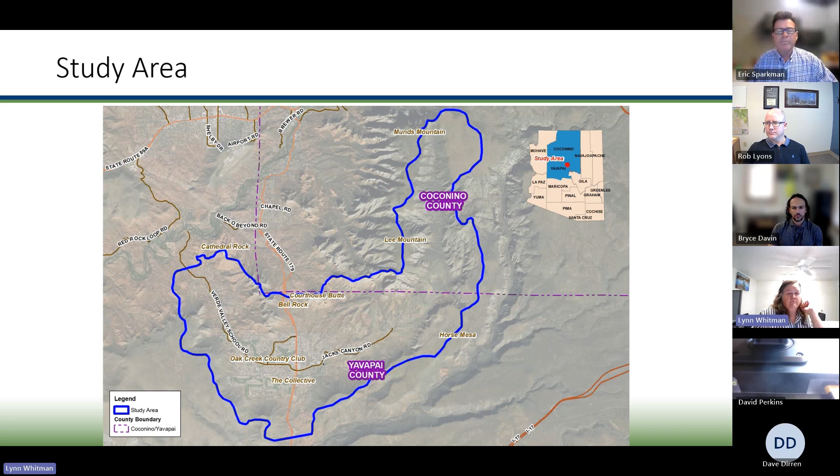Oh yeah, with that 2008 study, we identified 13 problems. We actually designed 6 projects and completed 3 of those. The other 3 projects, we had a hard time getting easements from people. I remember trying to get easements, and people either weren't interested, or a lot of it was people who didn't live in the area - they just weren't interested. So that one kind of died there.

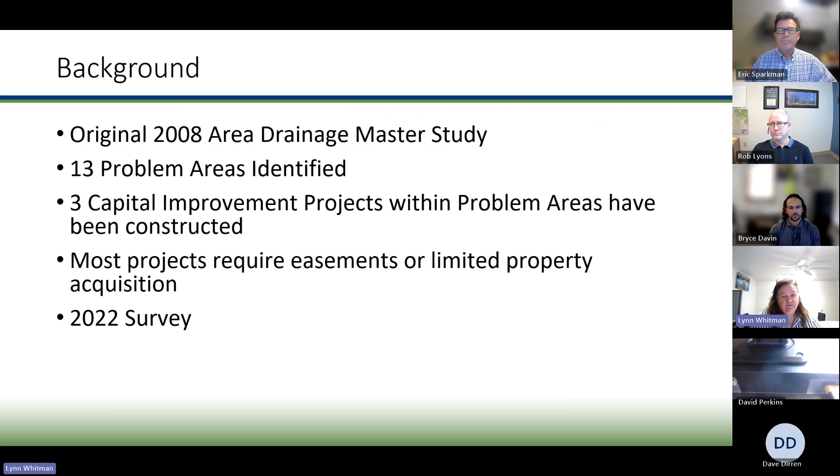So when we started this one, we wanted to make sure people knew: if a project comes through your area, are you going to be willing to provide us with easements? So in 2022, when we kicked this one off, we sent out a survey to everybody. The survey asked for information on drainage on your property, erosion on your property, anything in the area around you. We received 117 responses, which is really great turnout compared to some other projects we've done, and it gave us a lot of information and insight into where we should be looking and what kind of things we should be looking for.

So we wanted to develop a model that would simulate the existing drainage infrastructure. We wanted to be able to look and see where the problems were in the model as well. So we had information from residents on where they were seeing problems, but we also wanted to run a good rainstorm through a model of what's out there and see how much of it matches up, and if we can identify other areas that maybe people didn't talk about.

So we identified those regional problem areas. We talked about those at the last meeting and put those out for the public to review and let us know if they had any comments. Then we develop conceptual flood mitigation alternatives - we look at the problem areas, pick the ones that seem to be the biggest problems, and start talking about what we could do, what kind of projects we could put in to alleviate some of these issues.

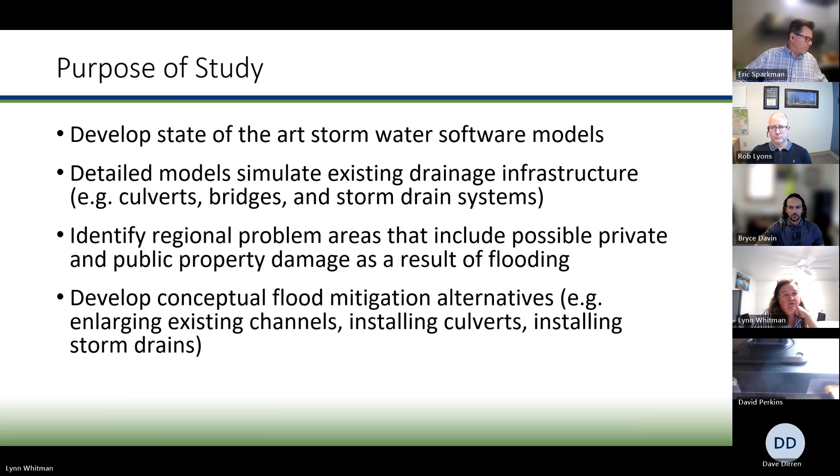And I believe this is where I pass it off to Rob so he can talk about the modeling.

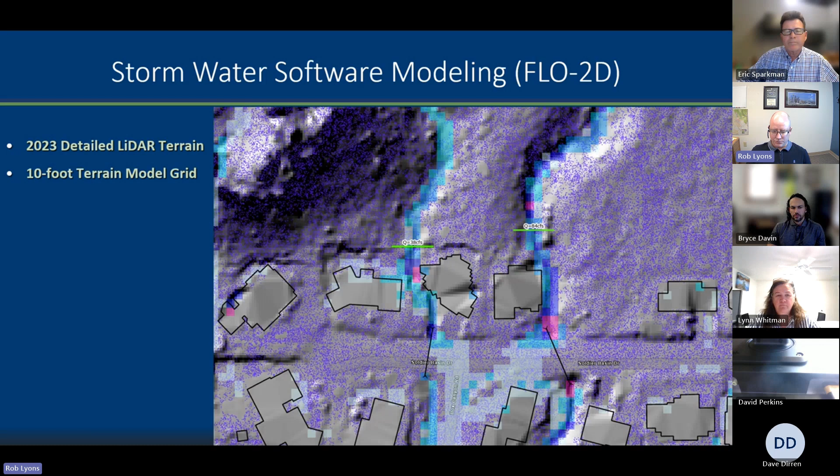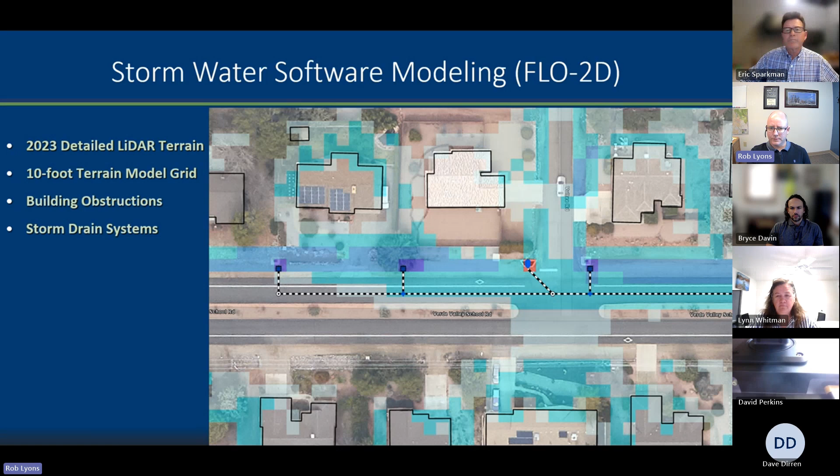And then we add building obstructions, storm drains. You can kind of see that in this aerial view here. This is on Verde Valley School Road. There's a pretty big storm drain in that road, if you're familiar with it. It's got catch basin inlets. Here's an example of one. This one's a little bit larger for even bigger flows.

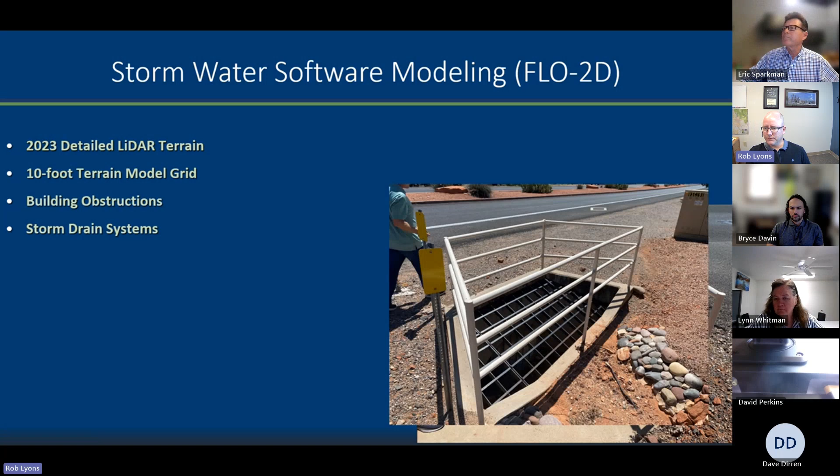You've probably seen lots of manholes, pipes, and then we also add in culverts and bridges. There's a number of those, particularly on Jack's Canyon Road.

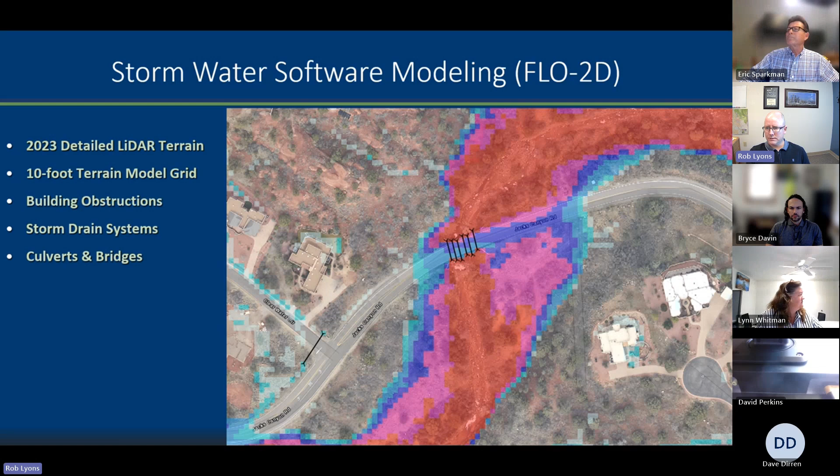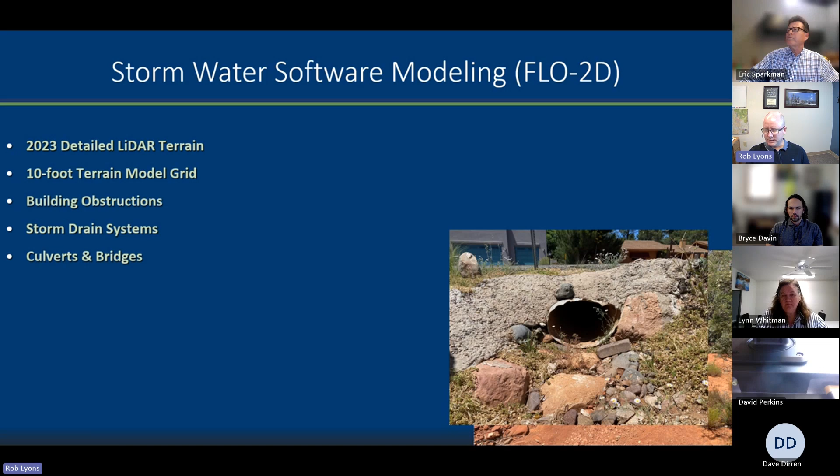There's some examples of some culverts or inlets. There's a driveway culvert, it looks like it's a little smashed. And another bridge.

And then with that, once you've got everything parameterized, you have a model that will give you results for any event you run. So you might have heard of the 100-year flood or a 10-year storm. We can run all those events, and that gives us design flow rates for if we decide we need to add a new culvert, or we want to add a storm drain or add a channel. Well, how big does it need to be?

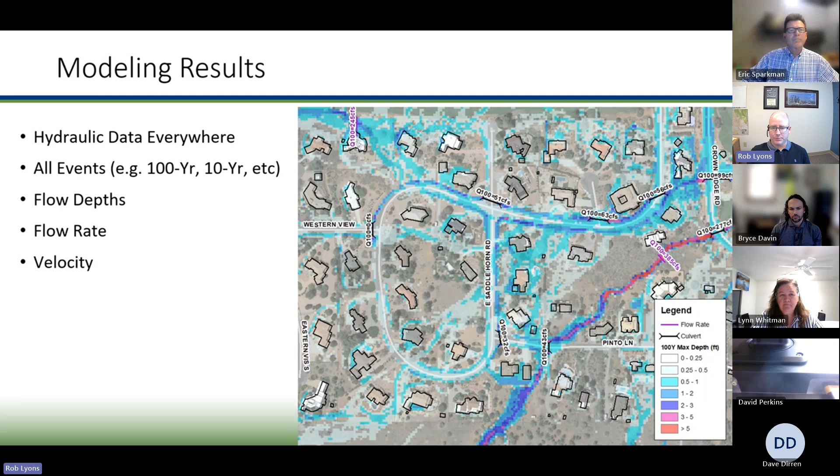So we need that information so that we can estimate how much flow is going to get to this proposed facility. And then it also shows us where the water's going, and is it intersecting with homes, for example, and it gives us flow depths, flow rates, and velocities. And velocities - the higher the velocity, the more erosive it is. So if you're building a channel, you might need to armor the channel so that it doesn't erode.

And then based on that data, we can combine it with additional ground truthing data that Lynn touched on, such as drainage complaints or just areas of known flood problems from the residents or from the county staff. We have the inundation analysis - that's where we basically take those flow depths and intersect them with building footprints, for example, from a product you get from the mapping company. And we can estimate, okay, it looks like some of these homes might get flooded in a 10-year flood or a 100-year flood. We don't know if it's true or not, because the data isn't that rich. It's close, but it's just another indicator that, like if you see a cluster of homes, for example, right here, there might be a problem there.

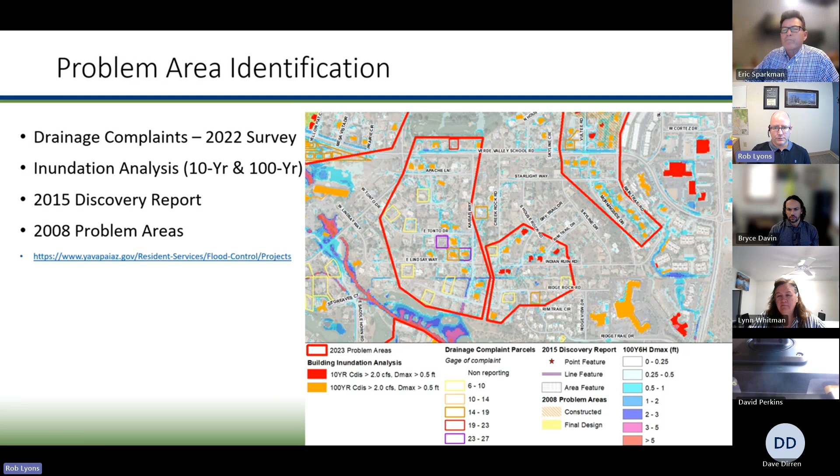There was another FEMA study that was done back in 2015, the Discovery Report. You can take some of those problem areas, and then, like Lynn mentioned, this original study was done in 2008, so we also looked at those problem areas. Then with that, we've identified clusters of areas that appear to have problems, and then basically call that a potential problem area, and then start looking at solutions.

So let's see, multiple ideas. We decided to just take the top 11 hazard areas. I think we had 17, but got to draw the line somewhere. And then we started to look at what are the things that might solve this problem. All ideas are on the table. And then once you have that list, then you can start going through and saying, this isn't going to work because we don't have the land, or it's going to be way too expensive and it won't pencil out.

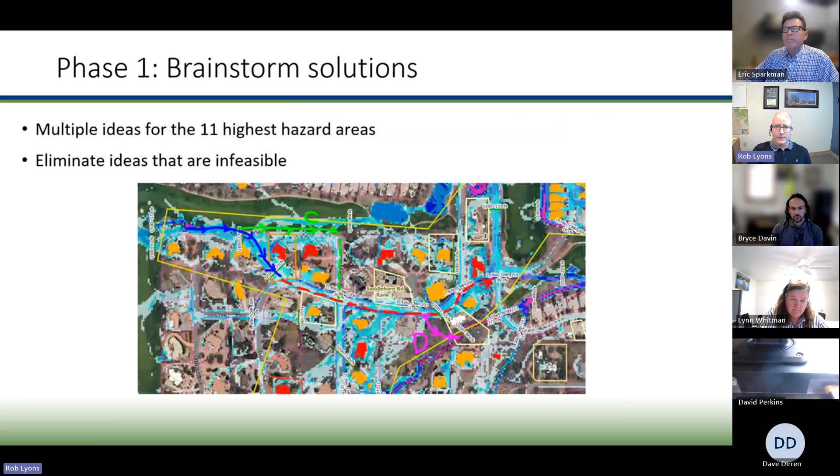So that's sort of phase one. And then we move into what we call phase two, which is, okay, now of the solution set that we think might have some legs, something that can actually work, you might be able to find some right of way, not super expensive. From that, now let's evaluate that a little bit higher. So that's basically where we're at in the study right now. We've finished the phase two alternatives evaluation. So I'm going to present the various alternatives that we've evaluated.

And then we'll touch on this at the end as well. The next phase will be kind of ranking those and then coming up with concept designs for the most feasible solutions for the most problematic areas. So stepping back, we're in phase 2. So I'm going to walk through the different alternatives that we've covered.

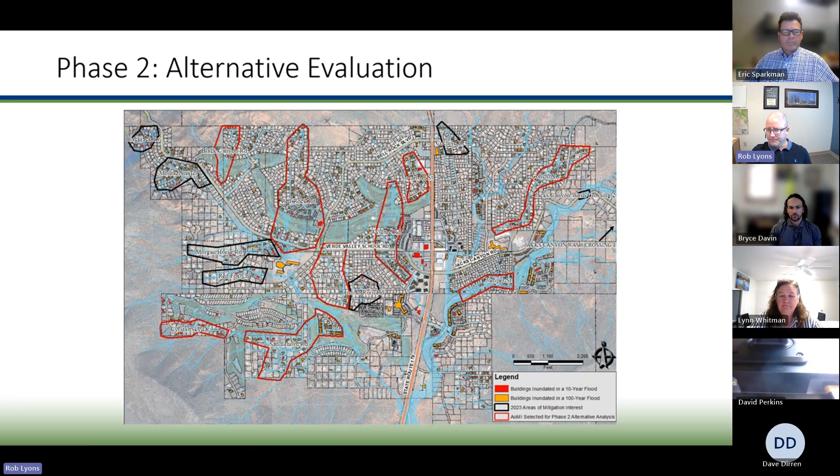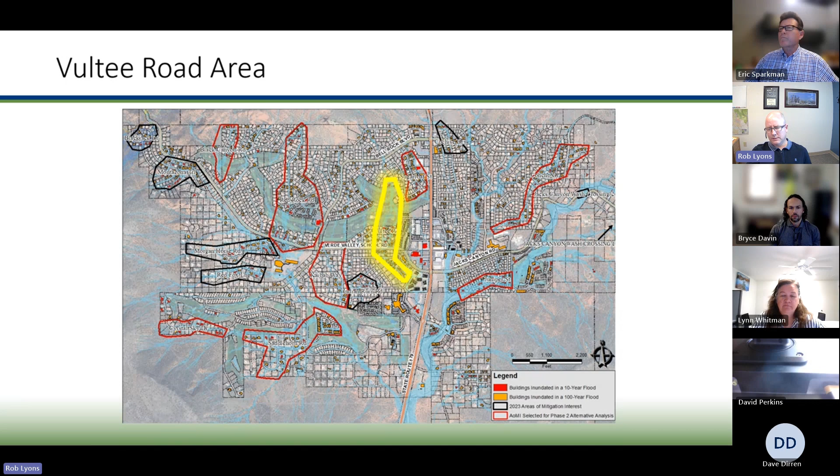This first one is the Vultee Road area. So you can see here highlighted in the yellow polygon where it's at. It's along Verde Valley School Road, just west of SR 179 along the Oak Creek Country Club.

So the first option was looking at trying to just prevent the flows from even getting to that residential area. If you move upstream, basically due north, the flows are coming off the monuments in the village of Oak Creek, then flowing through the Oak Creek Country Club golf course, and making its way down onto residential property. So this idea was, let's try to intercept that water before it even gets there.

And we know from the modeling that there's actually excess capacity in an existing storm drain along State Route 179, and there's a large custom inlet or catch basin that receives some of this flow already. So the idea was, let's just add some channels. It could take one of these two paths shown here on the screen and route those flows to the east to the highway.

This alternative would actually benefit potentially a couple fairways on the golf course, and reduces or removes the 100-year flood hazard for potentially up to 35 homes. The cost isn't that horrible. I mean, it's more money than I'd want to spend out of my own pocket, but relative to some other projects, it's not too bad.

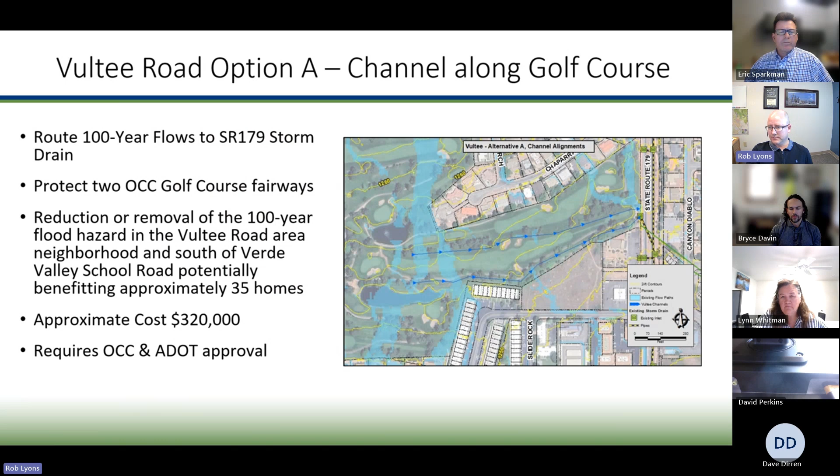Another alternative we looked at was, let's just see if we can capture some of the flow and put it in a detention basin, a stormwater detention basin. You can see there's a very conceptual layout of what the basin might look like. Basically excavate a hole, and then you'd need some sort of an outlet system to then redistribute the flows once it's been detained in the flood basin, so that it's redistributed downstream.

So the goal of this one was to reduce the flow rate, not completely eliminate it, but it's only one of the branches of the flow. So you still got water entering this Vultee Road area from more on the east side. But the goal is to reduce the flow rate down to something like a 10-year flow rate.

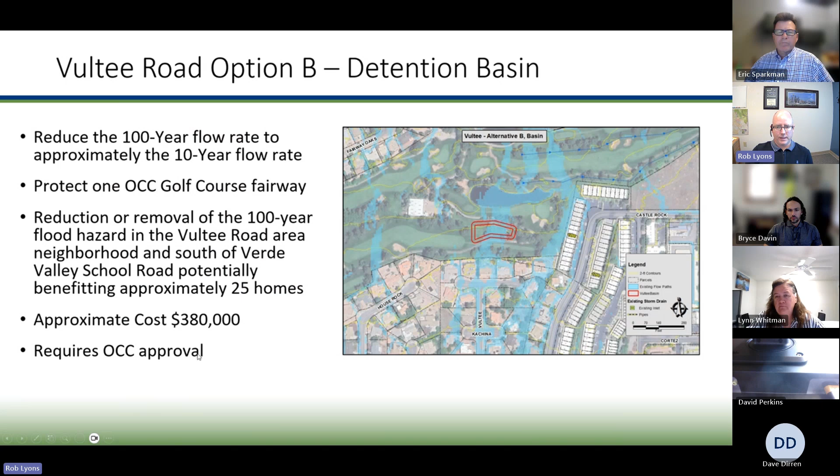It doesn't protect as much of the golf course. You could potentially benefit up to 25 homes. So not as many homes, and it's a little bit more expensive. The benefit of this one over the prior alternative is, it's not going into ADOT right of way, so we wouldn't have to prove to ADOT that their own system has capacity.

And then the final alternative for the Vultee Road area was to just add storm drain in existing right of way, basically right in the residential neighborhood. There is a storm drain trunk line in Verde Valley School Road that also appears to have some excess capacity. So we could potentially tap this new system into the existing storm drain in Verde Valley School Road. This one's a lot more expensive because you're ripping up streets, and there's existing utilities that would have to be accommodated.

Just the cost of the storm drain and the catch basin structures. And then this one only seems to benefit 6 homes in the Vultee area, north of Verde Valley School Road. There'd be some minor reduction into the areas south of Verde Valley School Road. We need to run the actual simulation to see how much of a benefit there is south. So again, the cost is a lot more.

I don't necessarily need to take the whole show. Lynn, Eric, or Bryce, do you have anything you want to add on this one? No, I think you covered it pretty good.

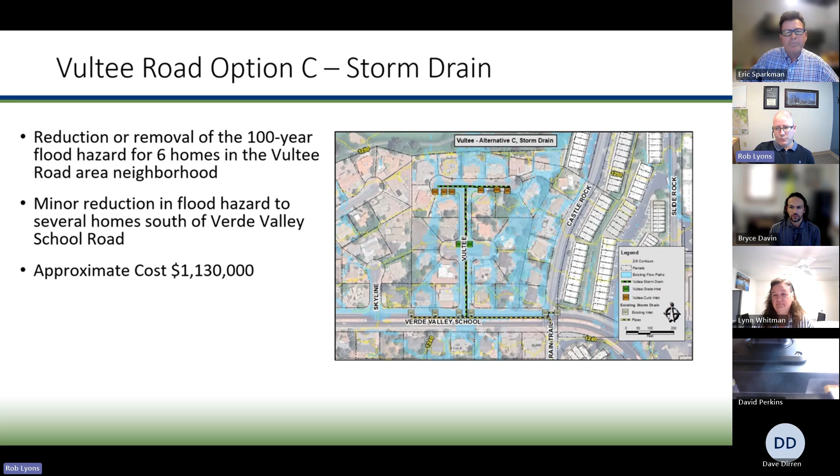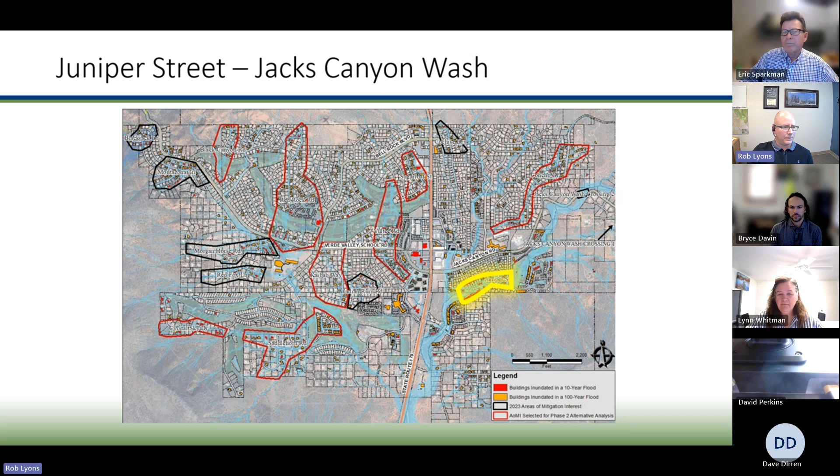Okay, so we'll move on to Jacks Canyon Wash. There's a number of locations along Jacks Canyon Wash where there's potentially people in the floodplain or access issues during a flood. This area around Juniper Street had a much larger cluster of homes that look like they're in the floodplain. Unfortunately, with such a large wash, there's limited things you can do. You're not going to put it in a storm drain—well, you could, but we're talking massive pipe because it's a pretty large flow rate. So the most feasible solution seemed to be some minor channelization of the wash, and we came up with a footprint of that channelization.

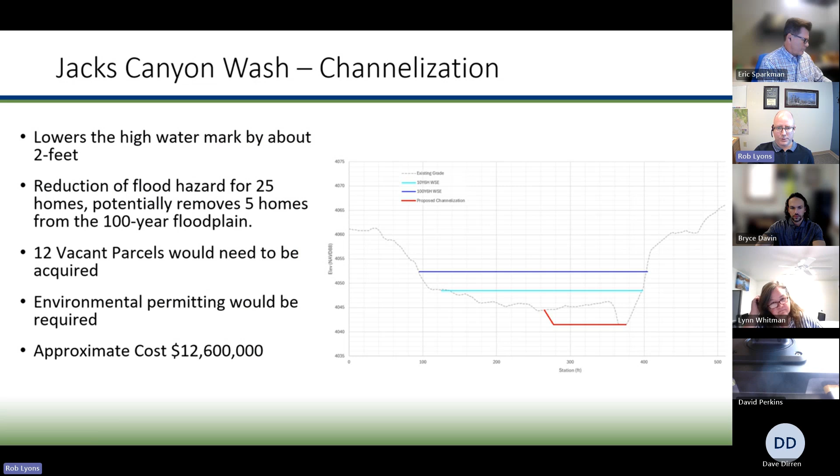There are some cons to this solution. It's obviously very expensive, and there are some parcels or properties that would need to be acquired. More than likely there's going to be some environmental permitting required too, because this is kind of a nice riparian area. Here's a view just showing the extents of this channelization.

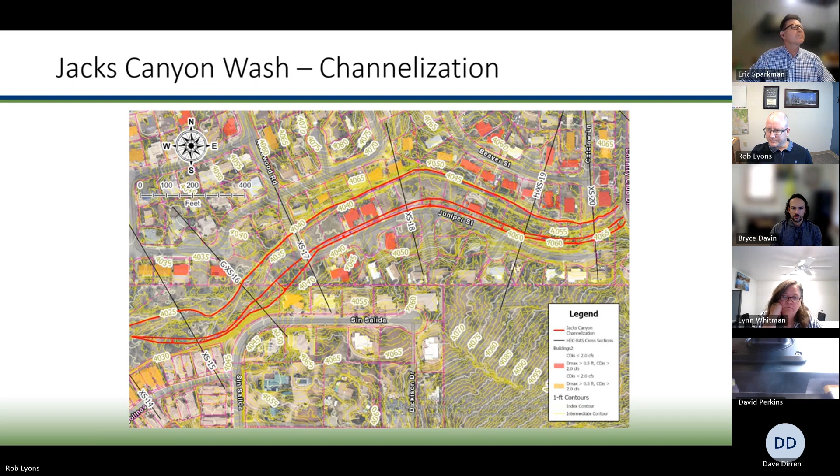Okay, anything the county wants to say on that one? Maybe I'll just chime in as we go if you want to add anything. Yeah, I'll add—even though that's an expensive project, anytime you can remove homes from the floodplain, it's not only a benefit to the homeowners, but it also helps us score higher when we apply for these competitive grants. So it's important to note, anytime you could get those homes out of the floodplain, it's definitely a big benefit.

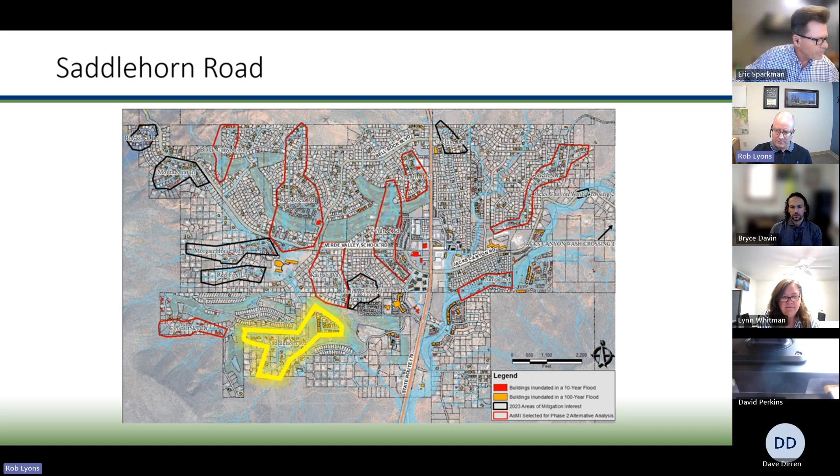So the next one is what we call the Saddlehorn Road area, down here in the southwest part of town. It's along—I believe this is the Sedona Golf Resort, there it is right there. This is an area that had a lot of potential homes getting flooded and some drainage complaints. So this option was to add yet another, like a fairway channel within the golf course, to intercept flows before they're going into people's backyards, and then route it in a storm drain all the way across—I forget what that road is—I think it's Crown Ridge Road.

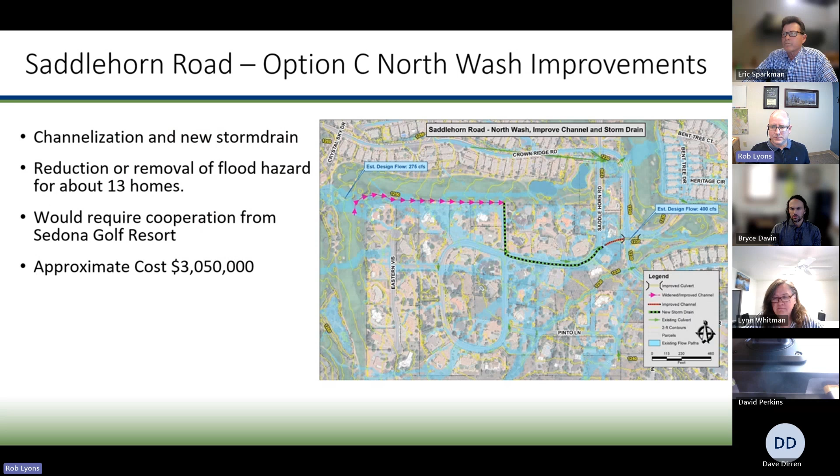This option shows a small channel between the storm drain outlet and then a new culvert, but you could also just storm drain the whole thing. This one could reduce or remove the flood hazard for up to 13 homes. Obviously, again, we would need cooperation from the golf resort, and it's about $3 million, so it's a little spendy. You'd end up having to deal with utilities too, because you've got existing roads. So not impossible, but there's definitely going to be challenges.

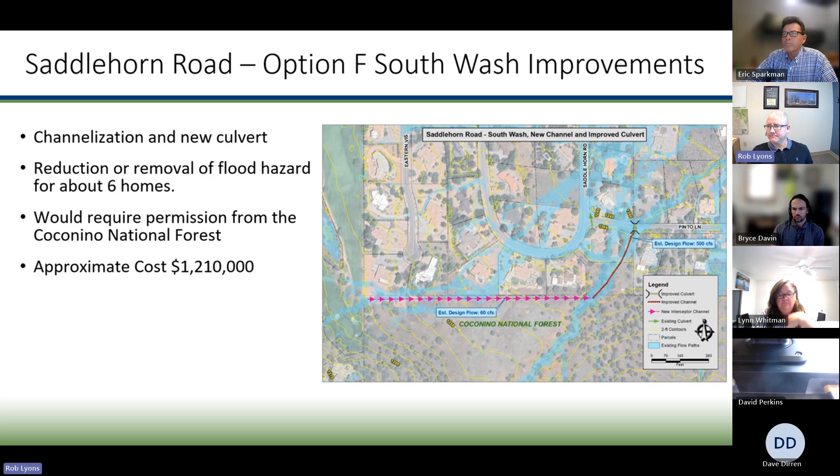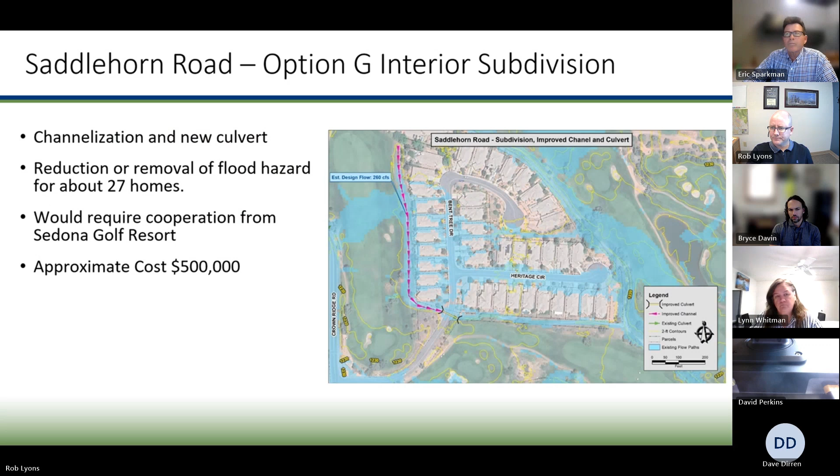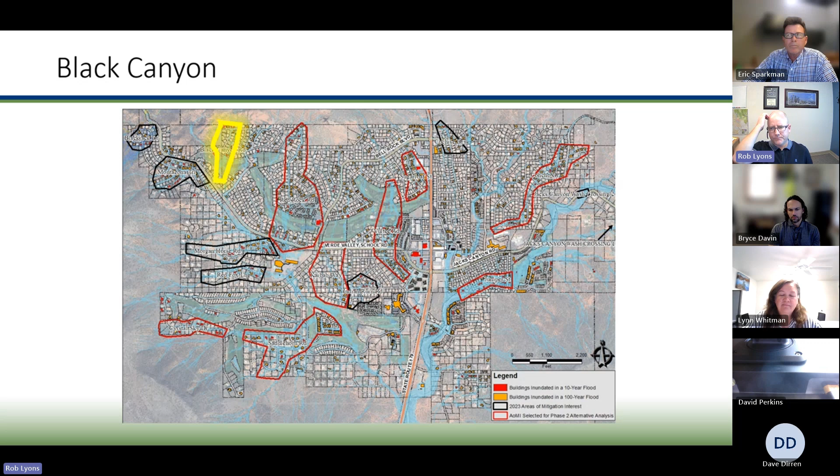Okay, moving on to Black Canyon. This one was really more to benefit the golf course. We understand this is an area where the golf course has concerns, so it wouldn't have a huge benefit on residential property owners. However, if we could work with the golf course and maybe combine this with another project where we need their cooperation, there might be some kind of win-win solution. I don't know if the county would necessarily pay for this, but there's some sort of negotiation that could happen with the golf course. Basically, this would remove flows from crossing the fairways, and then it would enter an existing channel in a more controlled fashion.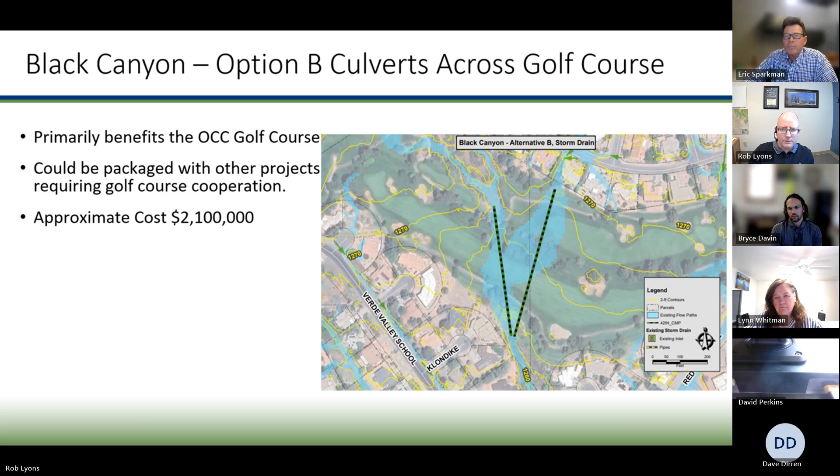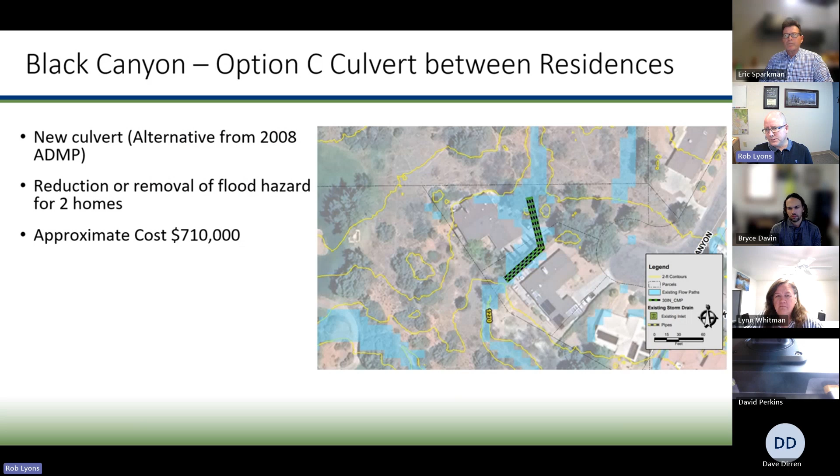And then this project here we left on the table. This was actually designed back in 2008. Basically it benefits 2 properties that have had some flooding in the past. It's basically just taking the flows and putting them underground in a culvert. Okay, anything more to add, Lynn or Eric?

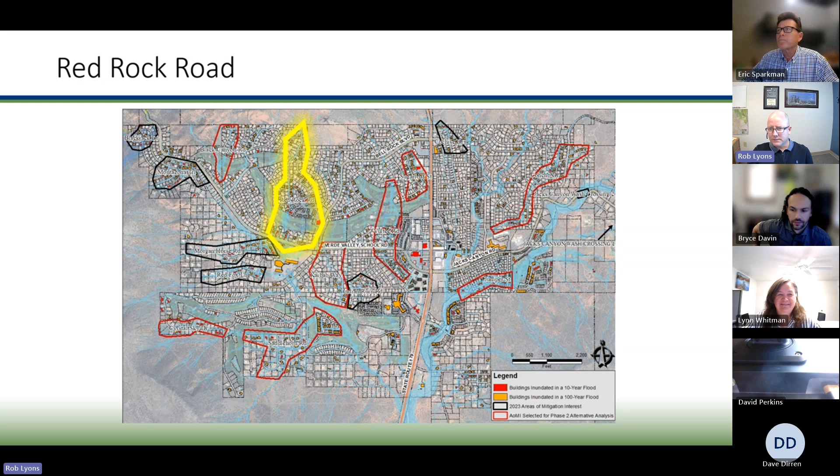Okay, I'll move on to Red Rock Road. This is again over at the Oak Creek Country Club. This area actually has a designed drainage ditch along Merry-Go-Round Rock Road, and there are a couple of culverts in place. The capacity of this ditch, shown here with the red arrows, is almost none. I think there might have been a little bit of capacity when it was built, but it's pretty much filled in with sediment.

So this alternative is basically increasing the capacity of that roadside ditch and routing the flows to an existing culvert that's getting hardly any flows right now. It would require upsizing or adding another barrel to that culvert to get the full 100-year flows, but it has the potential to remove the flood hazard for up to 3 homes.

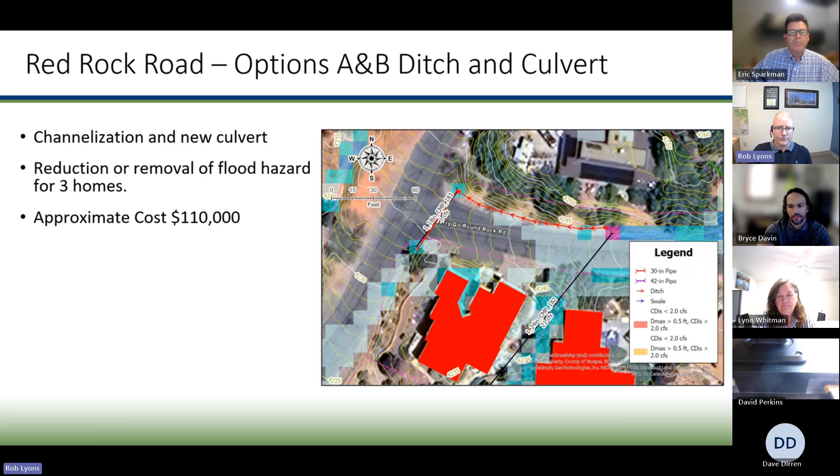And then this is another area within the Red Rock Road problem area. This one includes taking flows off of Red Rock Road. It's hard to see in this view, but as water accumulates down Red Rock Road, it starts to spread out, and there's a bunch of homes south of this view shown to be potentially subject to flood hazard. So this is basically taking those flows from Red Rock Road, routing them in a new channel within the golf course, and then daylighting that new channel out to an existing channel. This has the potential to reduce or remove the flood hazard for about 25 homes.

I'm not sure if I've got an image of it, but further downstream where Red Rock Road terminates, all that water flows out onto the golf course. So there would be a significant reduction in flows affecting the golf course. Hopefully, by working with the golf course to add this new channel in a controlled location, they would still get some benefit from that, even though they're having to give up some land for this channel.

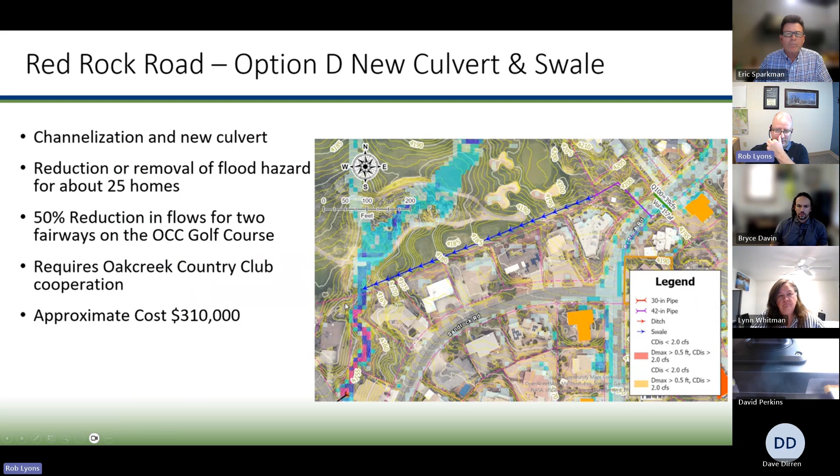Okay, Kaibab Way. That's where its location is. This is another one where it would have benefited to show the homes, but south of this area, there's a number of homes that were subject to flooding. We found what looked like a pretty optimal solution: basically just add a tall curb, or a pony wall if you will, along an existing alleyway that could then route the flows by the Oak Creek Country Club sign right there. There's an inlet.

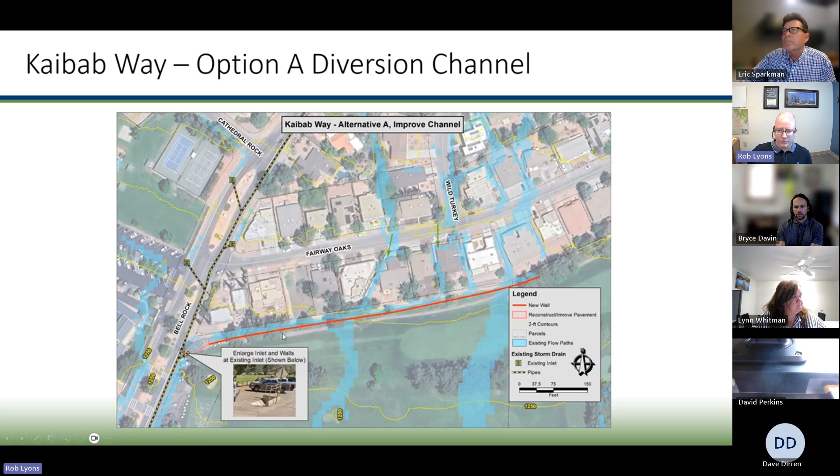It's shown right here on the lower left, kind of an inlet there. This might need to be improved a little bit to accept these additional flows if we're diverting all this flow from going onto the fairway and the driving range. But this would have the potential to reduce or remove the flood hazard for about 25 homes. It benefits the golf course, obviously requires their cooperation, but it's a relatively low cost solution.

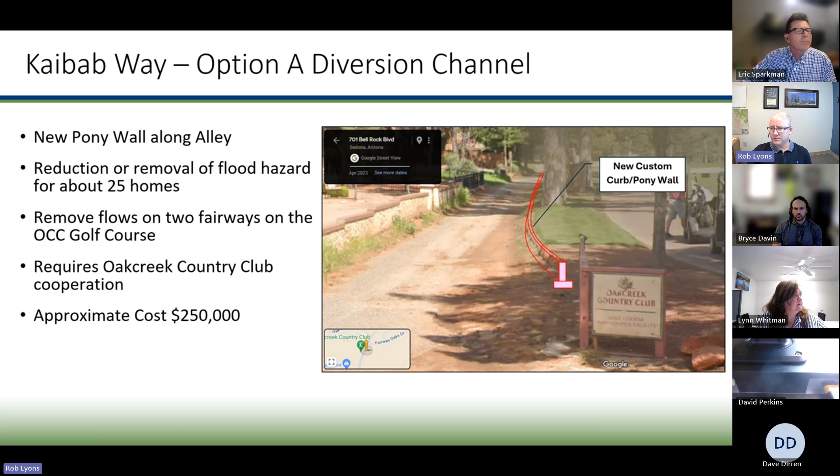I think this screen might... nope, it doesn't.

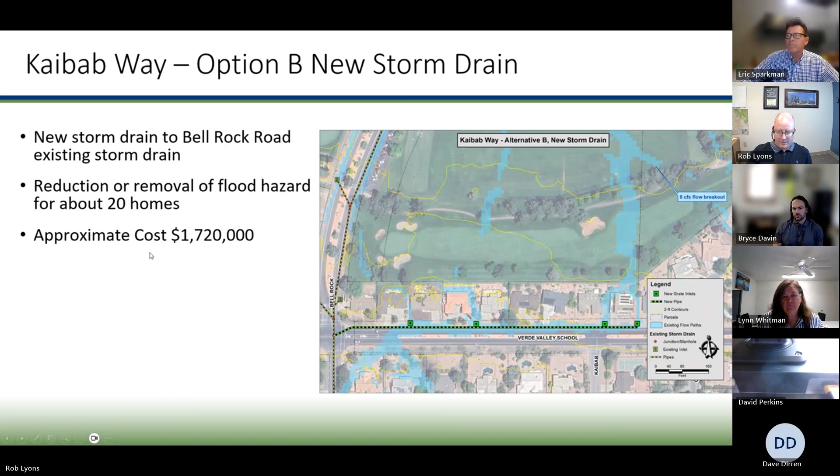Just south of Verde Valley School Road, a number of homes look subject to flood hazards from flows crossing the golf course. Another option for this area, instead of capturing flows further north along the alleyway, would be to add a new storm drain in Verde Valley School Road with catch basin inlets to collect flows and discharge them into an existing storm drain system down Bell Rock Road. Our model shows this system has excess capacity, so we could add another lateral storm drain to it. This wouldn't cover homes north of Verde Valley School Road, which wouldn't benefit much, but there are still 20 homes to the south of this proposed collection system that could benefit, at a cost of about 1.7 million.

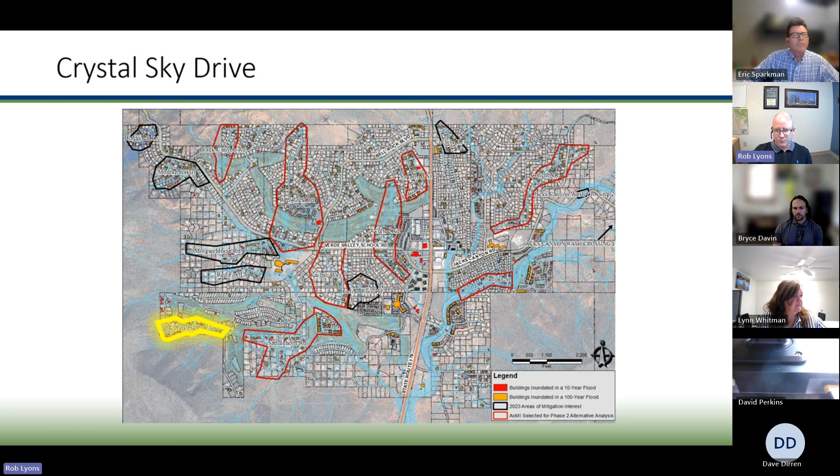Crystal Sky Drive, over on the southwest part of town, is another area where flows intersect existing homes. There's an existing storm drain, but it doesn't start until a ways down the road, and the area slopes to the east. The idea is to take water collected in the street and, before it jumps the curb and spills north, change the curbs to have more capacity—go with a vertical curb—and where it intersects driveways, modify the driveways to maintain that elevated crest so water doesn't spill north. It's relatively simple, just adding curbing and driveway modifications, but because of the length it's somewhat expensive. It has the potential to reduce or remove the flood hazard for up to 5 homes.

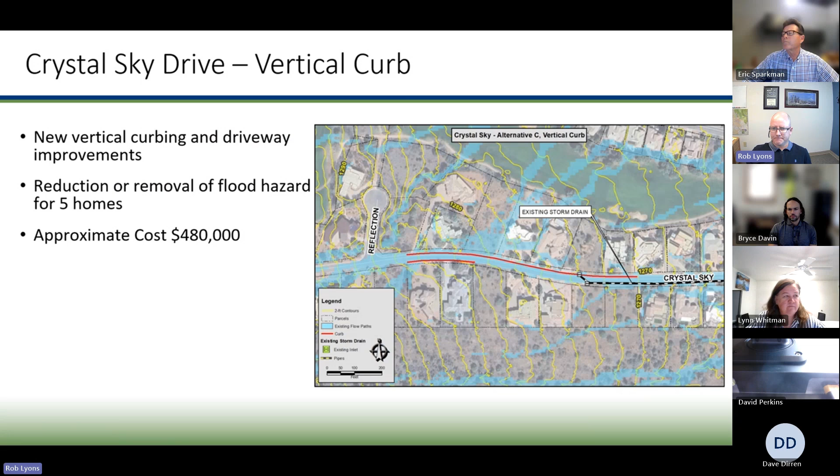And Lynn, I think this was actually your slide, so I'm going to let you take it over. Sorry about that. Yes, yes.

We have three levels of funding we look at. For smaller projects, say $250,000 or less, we can sometimes find money in a given year if it's a priority. Anything more goes into a 5-year plan, covering all the projects we'd like to do with money we expect from our secondary property tax. The third level is grant funded. Our tax levy is $5 million, but we give a lot back to communities, so our project budget is much smaller. We're pretty good at getting grants, but they have to meet certain criteria, so when we get a list like this, we look at which ones qualify for a grant and apply immediately since it takes time to get that grant. We also ask which ones we could do right now with funding we already have—so even if it's not the number one project, we can start on it and tick it off while other projects sit in our 5-year plan. That's why project number one might get put into the 5-year plan while project number 7 gets done in the meantime.